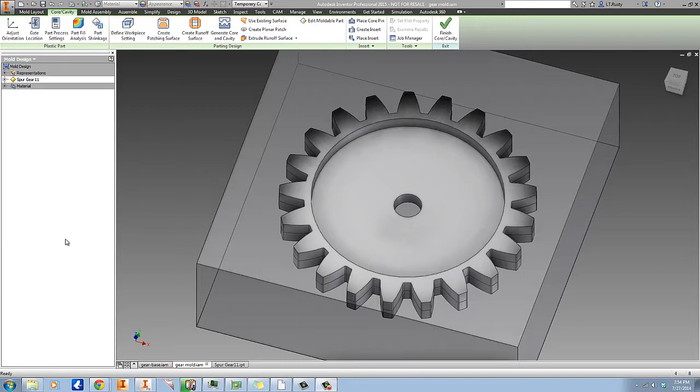Now, as I look at this, I realize there is one thing I want to do differently. I want to flip this part over. I want the pocket on the top to actually be molded on the bottom half of the part. So we're going to do adjust orientation, and you notice we've got our coordinate system down here. So I want to rotate it 180 degrees on the x-axis.

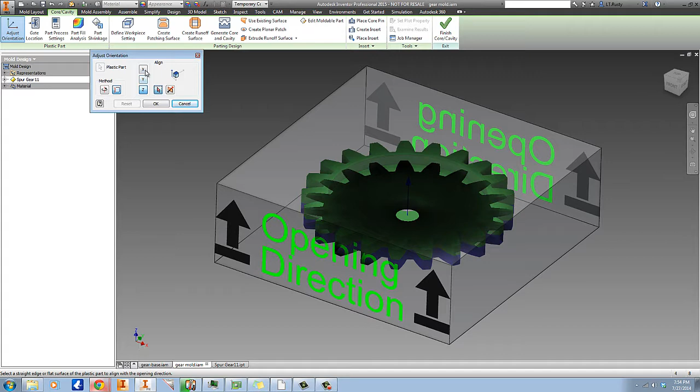So pick X, rotate 180, click OK, or click the checkbox and then click OK. Now you notice that we're flipped the other way.

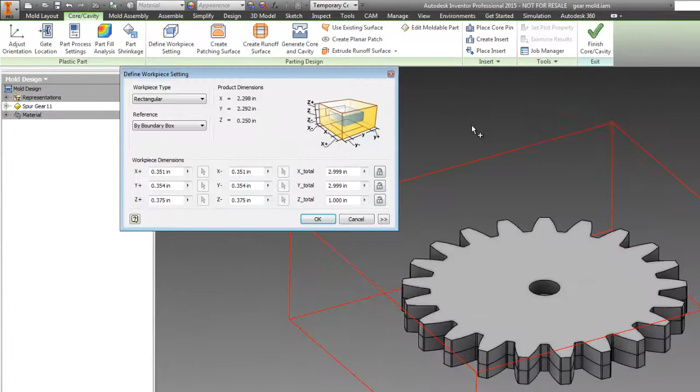And I want to redefine the workpiece now because it moved a little. And 3, 3, and 1 is good still. So click OK again, and now our workpiece is correctly located.

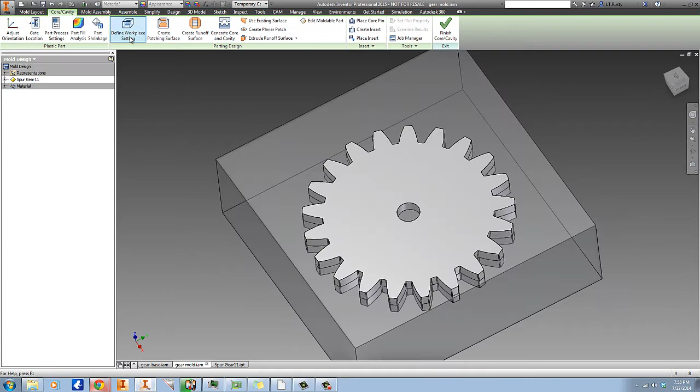First thing we need to do now is create a patching surface. A patching surface is basically a shutoff in your mold where the core and the cavity parts actually meet, to close off an open hole in your part. And we only have one open hole, and it's right there.

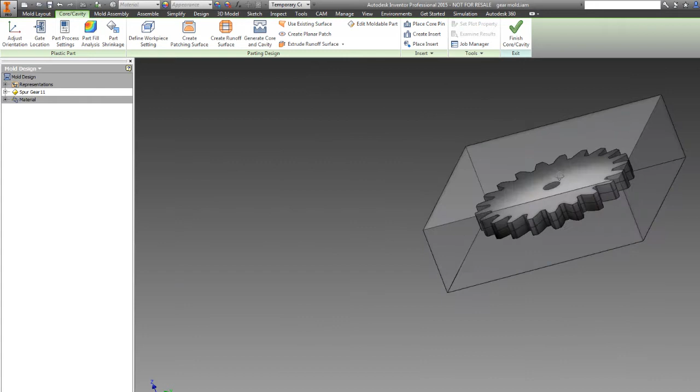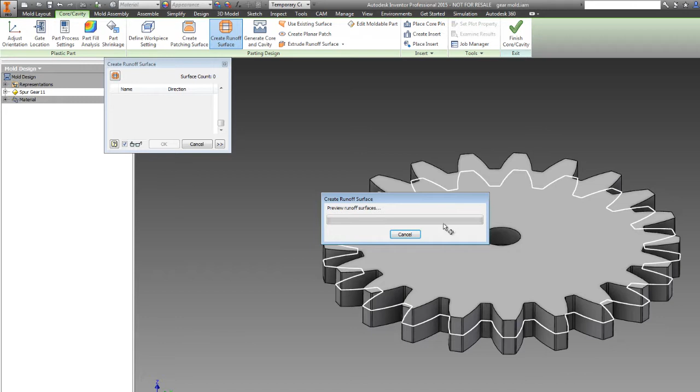So click OK. Then we need to create our runoff surface, which is going to be the split between the core and the cavity. You notice I've got my parting line prepared here. If we look carefully, you can see we've got about 1/4 of a degree of draft around the outside of the part. So that's our parting line. And there we go, so click OK.

In this case, since we're doing a fairly simple part here, we don't need to worry about core pins or inserts, so we're just not going to stress about that. Now I'm going to go ahead and hit generate core and cavity.

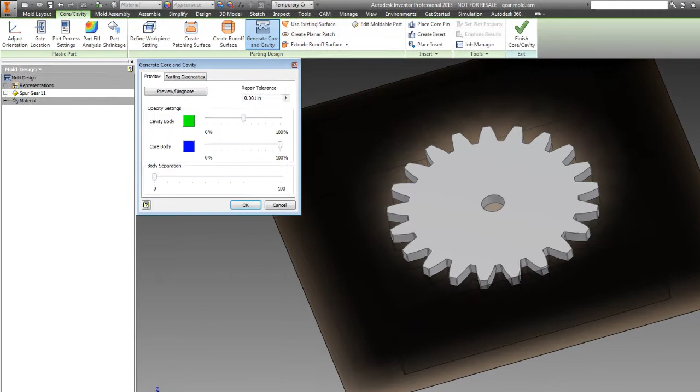And let's take a look at preview here. You can see the blue is going to be the core, the green is going to be the cavity. Parting diagnostics says we have an undercut. Where?

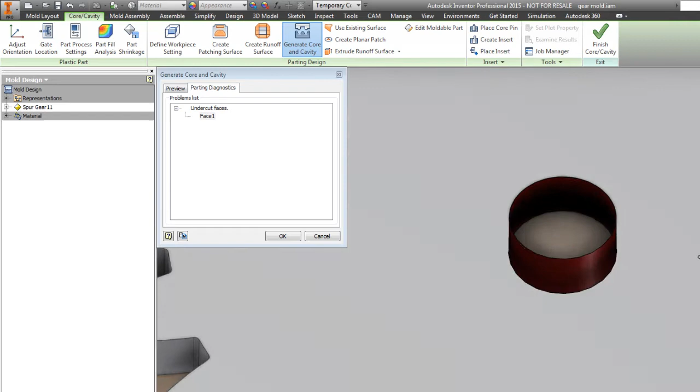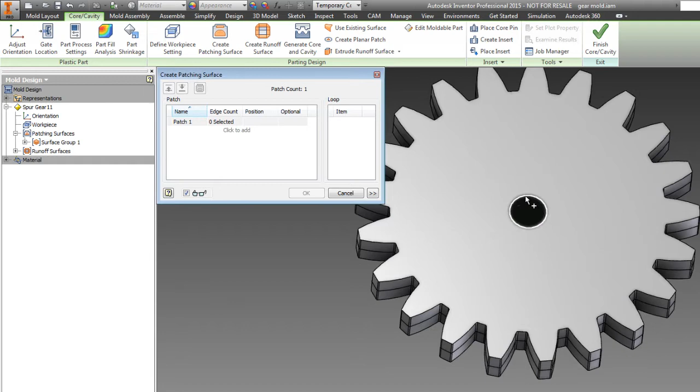Well, look at that. The draft on that means we need to have a parting surface, or our patching surface, up on the top. Let's go ahead and hit cancel there, and we'll just edit our patching surfaces. We'll uncheck that one, we'll pick that one, go ahead and hit OK.

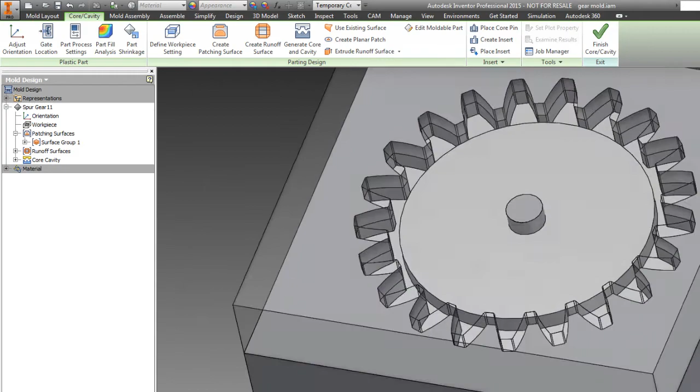Generate core and cavity again. Parting diagnostics—I've got to hit preview first. Parting diagnostics: no problems detected. Hit OK. And now Inventor has automatically created for us the core and cavity inserts for a mold. So finish core and cavity.

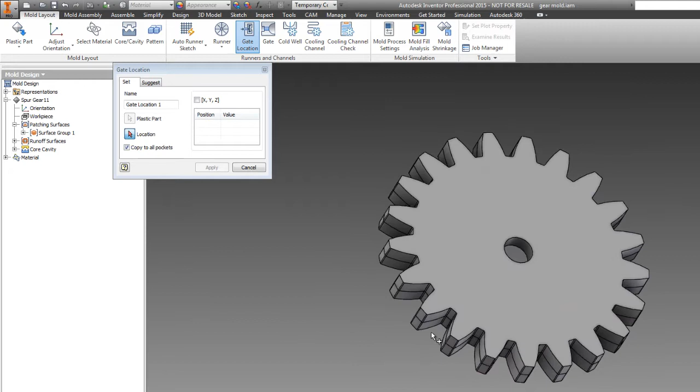And now we need to do our gate location. Gate location can be a fairly esoteric exercise, and we're going to simplify it by not worrying too much about the location. We're not going to stress. This would, in reality, be a very bad place to put a gate, just because when you trim it, you are potentially going to leave some nastiness on your meshing face.

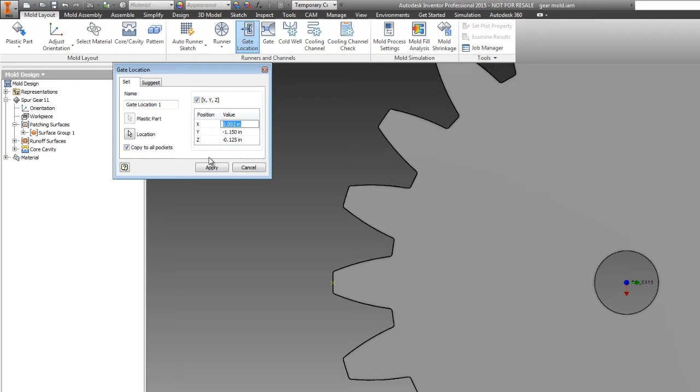We're going to edit this a little bit. I want this to be x0, so it's precisely in the middle. Z .125 is fine—you notice our negative 0.125 is fine. That's straight down the z-axis halfway, right on the parting line. So that's good, we'll call that done.

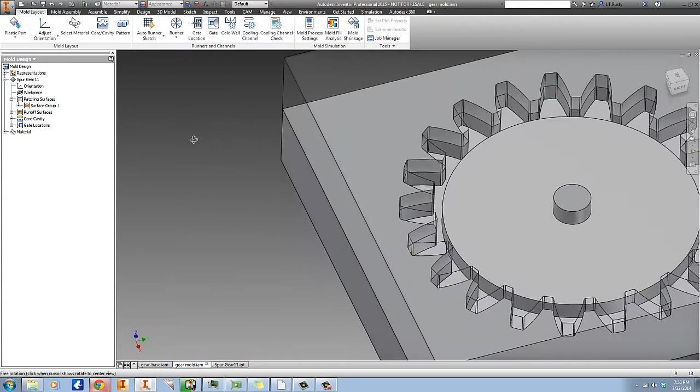And then we need a quick runner sketch. I like to do a manual sketch here. What we're going to do with the runner sketch is just lay out the exact location for the runner itself and how it's going to...

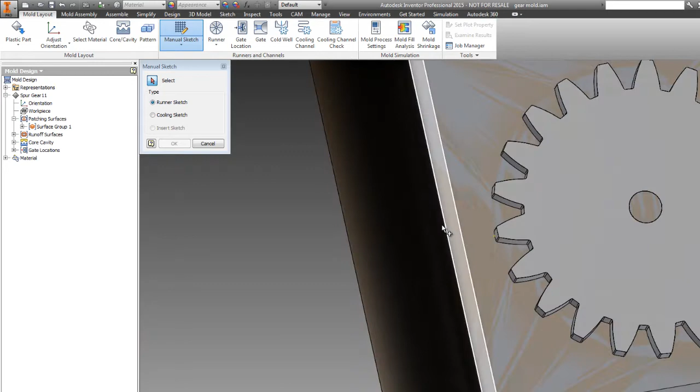Actually, no, we don't want to do that quite yet. I want to do the gate itself first. It'll be a little bit easier.

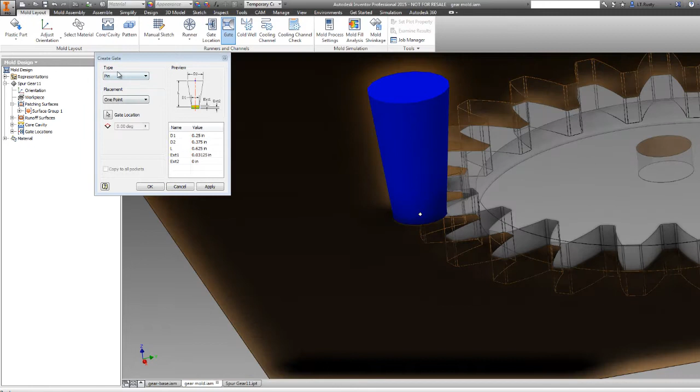So we've got a few different types of gates we can do. A pin gate probably isn't going to be the best option here, obviously, just because of where our gate is. An edge gate is going to be kind of what we want, but we want to rotate that around by, let's see, 90—nope, we need to go to 270.

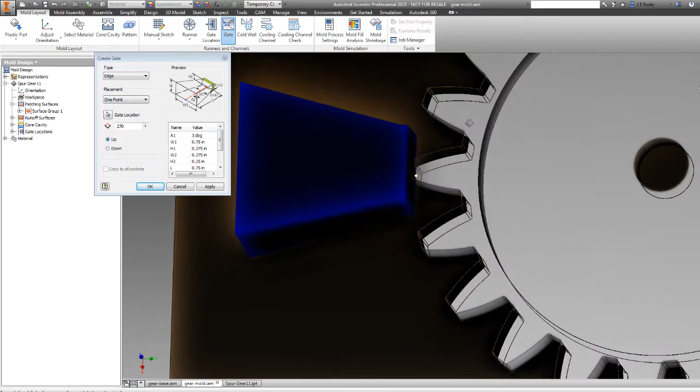And we're going to go up. And... no, actually we are going to go down. Now we just need to adjust these.

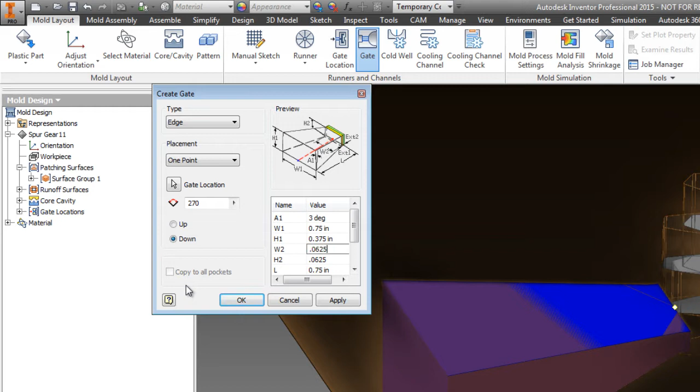So H2, we're going to call that 0.0625, a 16th of an inch. You can see everything adjusting here with us. Width to 0.0625, again a 16th of an inch. And now 0.03125.

And we want H1 and W1 now. W1 we can probably go 0.25. Height, we go 0.125.

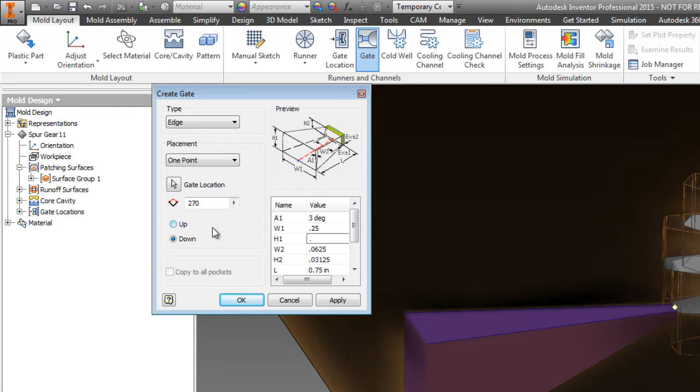And length, I want the length to be a little bit shorter on this, 0.375, so we'll cut that in half. Now you notice here that the gate only really touches right on that center point there. So we need to adjust extension 2, and what that's going to do is push the tip of the gate into the cavity. Now since it's a hole in the core, it's not actually going to leave anything in the part. We'll call that 0.03125.

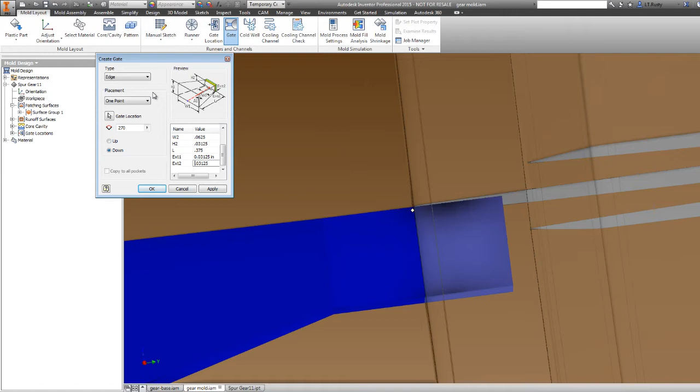And pretty much so long as that blue is fully encased at the end inside the core, we're going to be good. So we'll go ahead and hit OK.

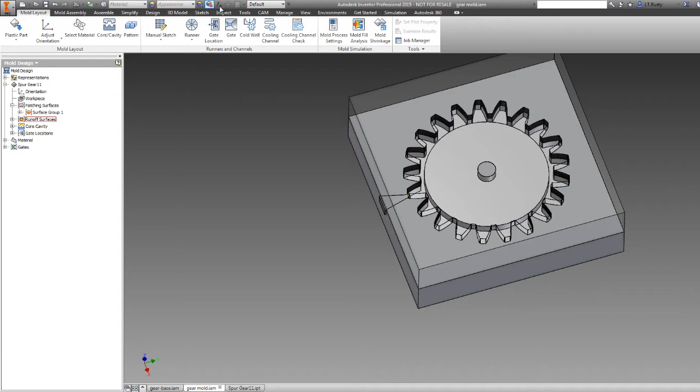That is probably not going to be big enough. So what do we do? We could make the gate a little bit smaller by adjusting L down a little bit, and we'll do that, 0.25.

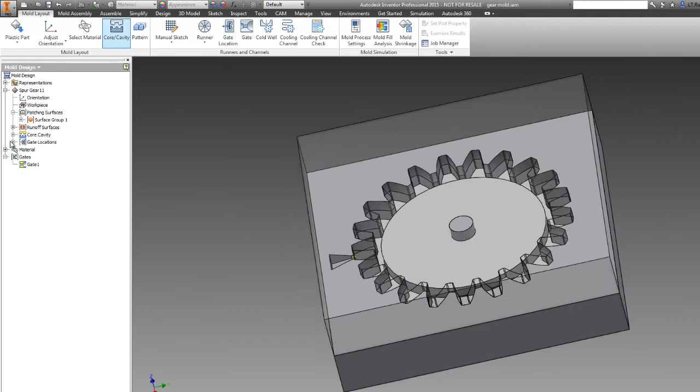But the thing that we really want to do here is go back to core cavity, and you notice that the core itself, the core part, has updated to show our gate that's cut in there. We're going to adjust the workpiece setting.

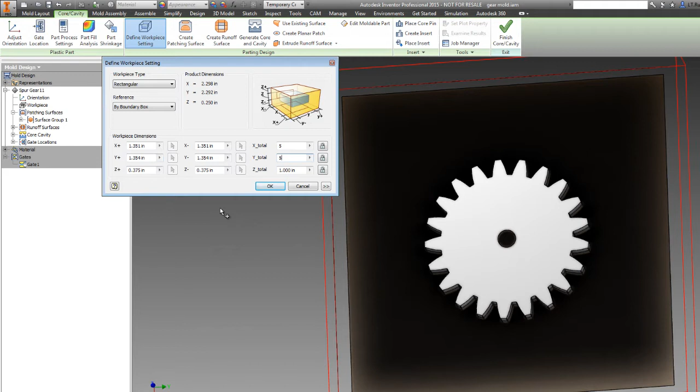I want to make this 5 by 5. Yeah, that's probably a little bit bigger than we strictly speaking needed to go, or we could have just offset the gear a little bit.

In fact, why don't we go ahead and do that? I'm going to redefine the workpiece setting again, make that a little bit smaller, 4.

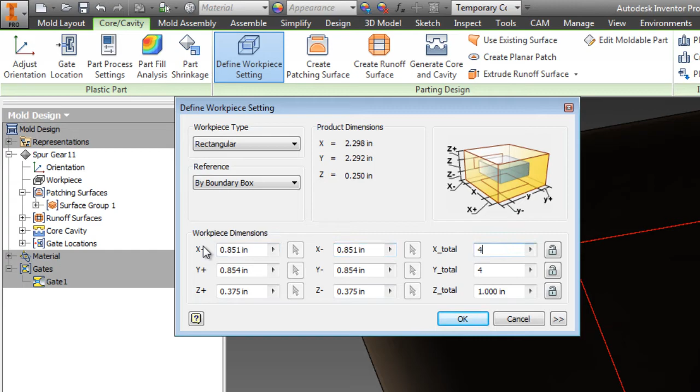No, let's just leave it at 5 by 5, since we're on a time constraint. Don't need to take the time to do math in our heads.

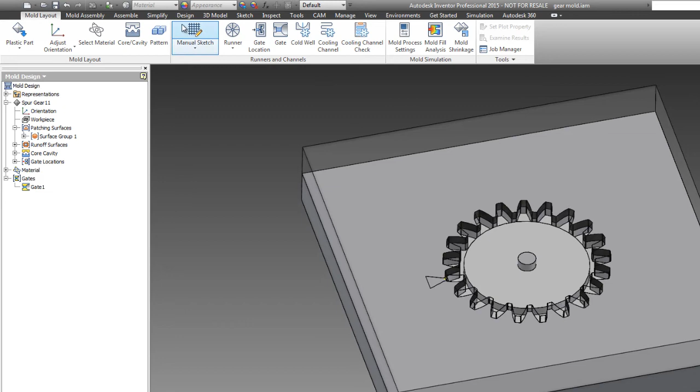Alright, I'm going to go ahead and finish the core cavity out again. Now we're going to do a runner sketch, and we want to select a face, and of course we want to select the parting face there. So we'll hit OK.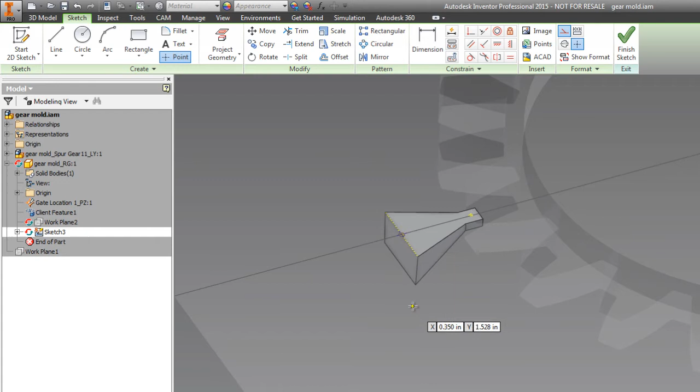And we need to project out a start point for our gate, and in this case we're going to start from that face right there, and we're going to drop a point there to start from. And we'll pick the line tool, and it'll come that way, then it'll come that way.

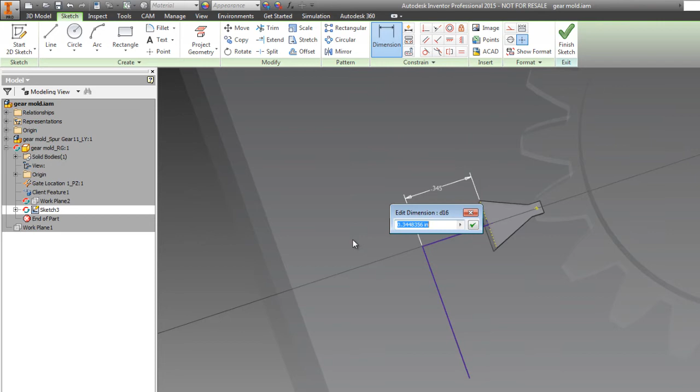And we're going to go ahead and dimension these. I want this segment to be 0.375 inches, and we want this segment - let me pick the dimension tool again here, I lost it - to be 0.5625 inches.

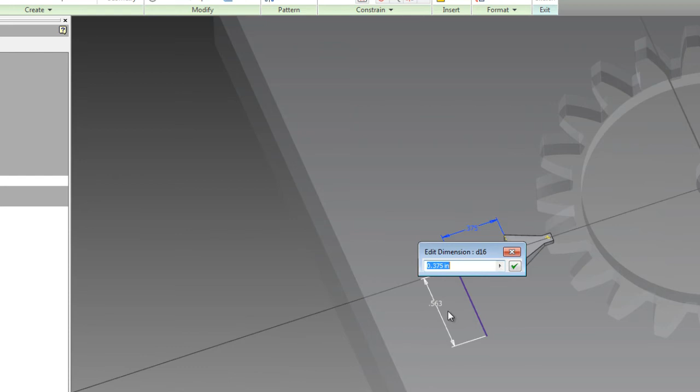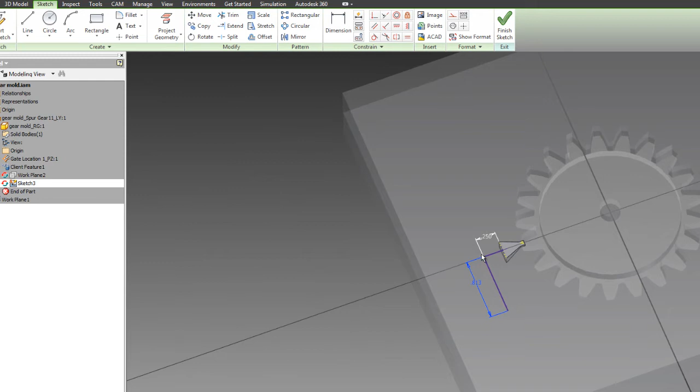Actually, let's make that a little bit shorter, 0.25, and let's make that one a little bit longer, 0.8125. Now you can see how easy it is to just go in here and change a dimension, and later on, after we've got a complete assembled mold, I'll still be able to just go back and change either one of those dimensions, and the entire rest of the mold will update.

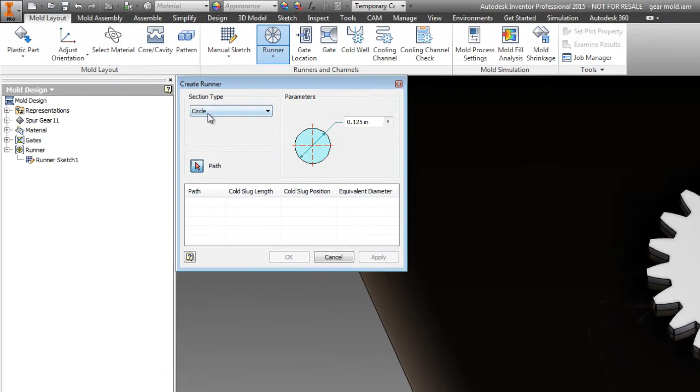So now we've finished our sketch out, and going to return to the top. You can see we've got our runner sketch there, and I'm going to go ahead and create our runners. I'm going to pick that segment and pick that segment.

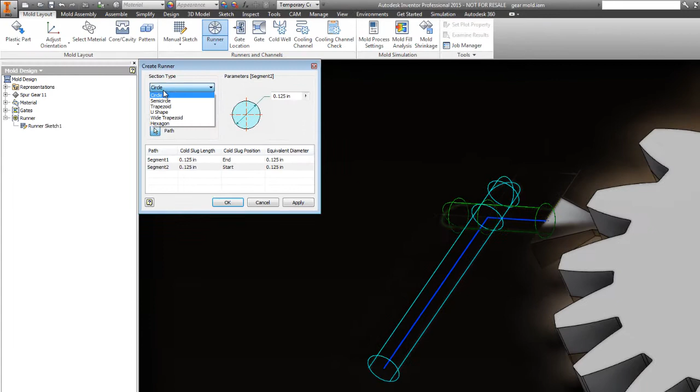Now a perfectly round runner here is not really going to be that helpful, because as you can see, it's going to be sticking up above the top of our gate. So we're going to change that to be a semicircle with radius 0.125, which is going to match up fairly nicely here.

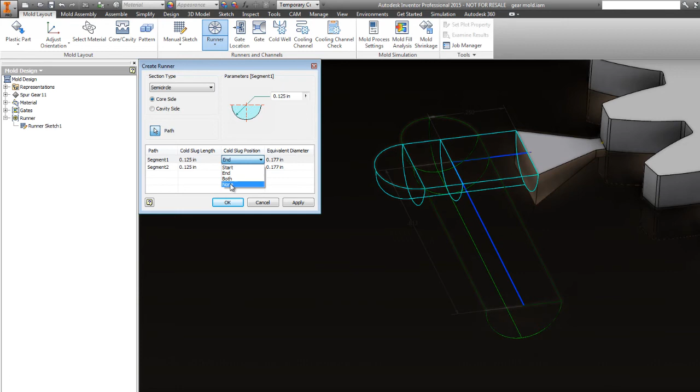For segment 1, we don't actually need a cold slug on it. We do need one on segment 2 there. So I'm going to go ahead and change cold slug position to none, and we're going to keep the one on segment 2. So we'll go ahead and hit OK.

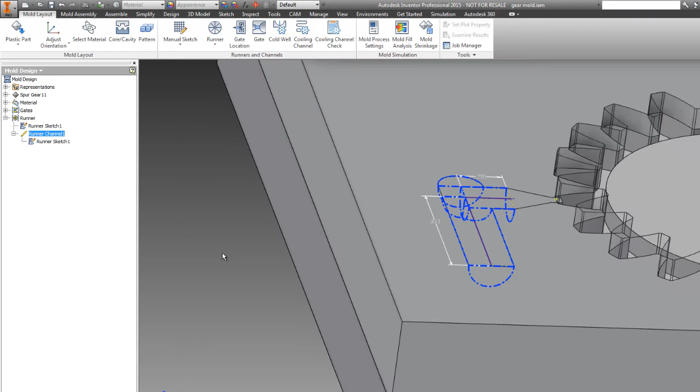And again here you can see that it's created the runner channel here, but it has not cut it out of the part. You won't see it cut out unless we skip over here to core and cavity.

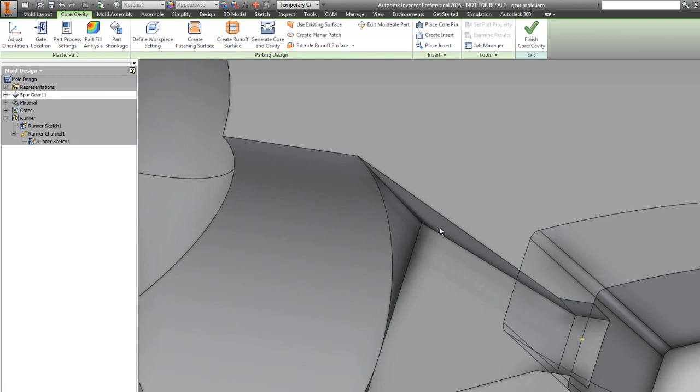And you'll notice that there's a little bit of extra geometry right there, and we can go back later on and tweak that if we want to. Obviously this would be very, very difficult to mill, so you might find that you're doing an EDM cut on that, but you probably will want to adjust this in order to have smooth flow.

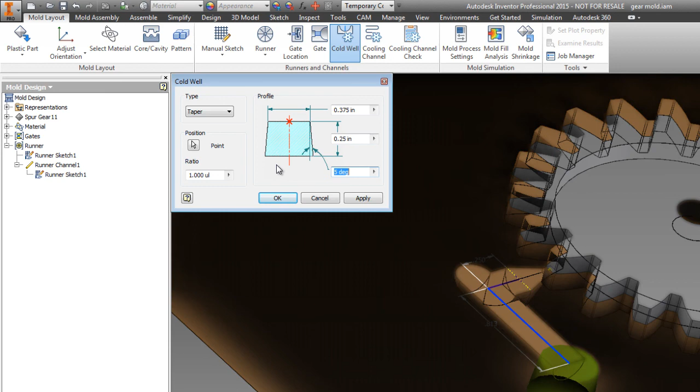So let's finish on core and cavity again, and go ahead and put in a cold well. We want a cold well right here at the bottom of where the sprue is going to come in. Well, a little bit more draft than that, so minus 5, and we want the draft going in the right direction too, more to the point. We'll leave the diameter where it is for now - that's going to be too big though, I think. So we'll hit OK, and you can see it just gets added to the runner system there.

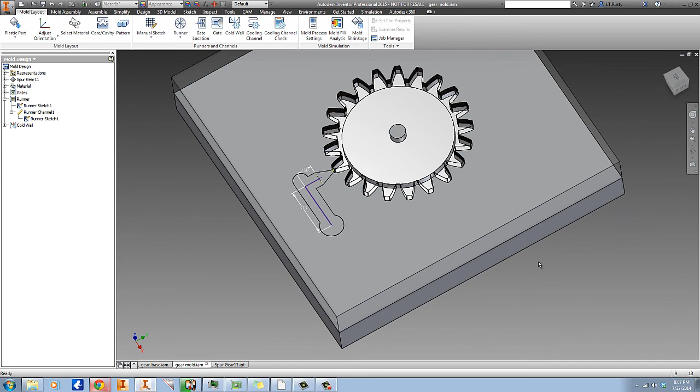And now go ahead and take a few minutes and try and get caught up, and then when you come back, we're going to move ahead with the rest of the mold parts.